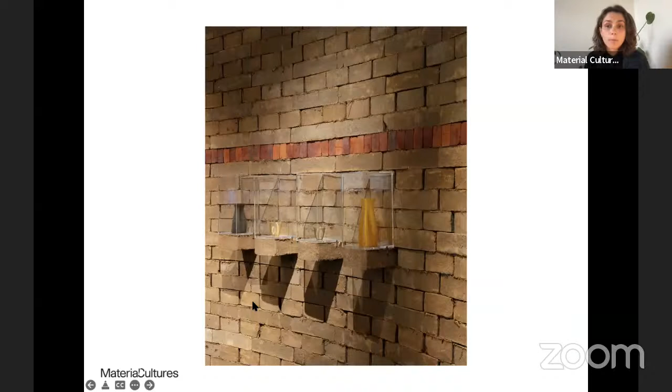So our work encompasses advocacy through design and curatorial work, where we can demonstrate the beauty and adaptability and also the practicalities really of working with low embodied carbon materials, as well as the extraordinary impact that they can have on the thermal performance and embodied carbon of our building stock. And we teach currently between the three of us, across Central St Martin's and also the Architectural Association.

And this is a project we finished with our students last year called Carbon Copies. And for this project, our MArch students looked at the impact of translating a series of iconic residential typologies, which exist today in London, into a fully bio-based and low carbon material palette.

And then they built fragments of them at 1:1. On the left, you have a detail of the party wall in the Eric Lyons span house typology, remade predominantly in adobe and timber. On the right is an example of the Walter Segal self-build method made in a bio-based palette with very thick walls, which adapt to regional insulation stocks. In this instance, I think it's built with cork.

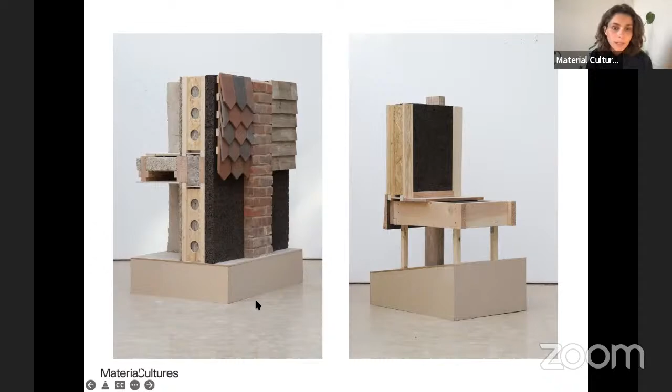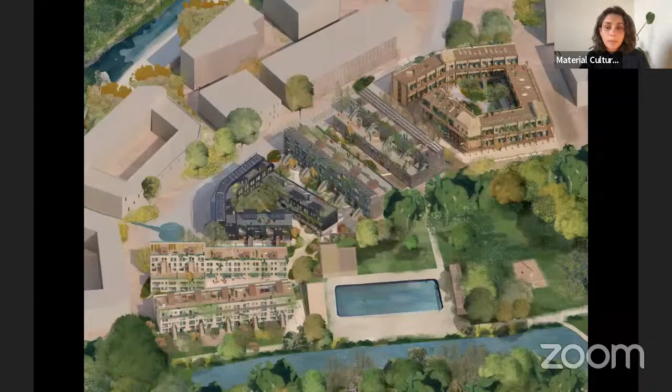We also design demonstrator buildings, which are prototypical and can be applied at scale across new build developments. So we think with every instance about the impact of that typology, and we work with our clients to develop offsite fabrication strategies for their projects, which work with regional and bio-based material supply chains.

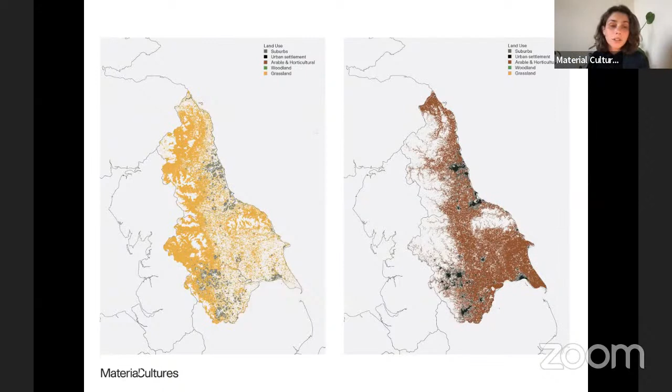And our work also encompasses research into materials and their application in construction, but also crucially on their impact on our culture and on our landscape.

So we look in our work to support systemic change in the construction industry. For the last 50 years, we've been using crude oil to try and solve the problems of sustainability in architecture. And the realization that this type of sustainability is short-lived has finally dawned.

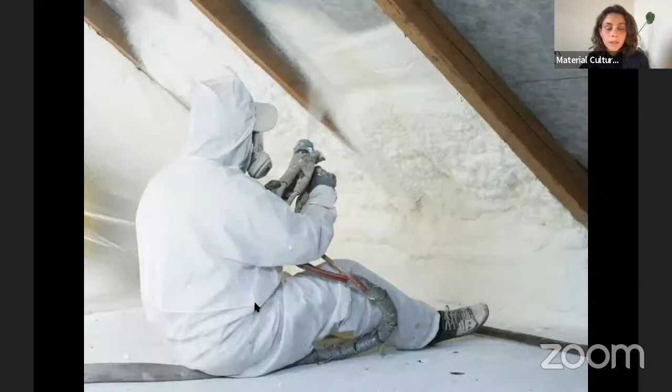And it's in this context that we established Material Cultures. Our construction industry has produced a multitude of oil-based insulating and high-performance products made from polyurethane and polystyrene insulations and nylon thermal resistors and PVC air tightness membranes, all extraordinary products in their own way.

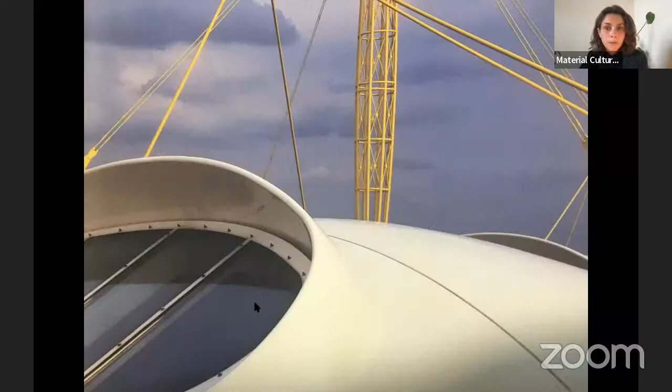And we developed construction technology using materials like steel and aluminium and glass. Their availability is dependent on vast quantities of cheaply available oil in the form of air conditioning systems or heat recovery units or even triple glazing. These technologies are neither durable, nor are they expected necessarily to last.

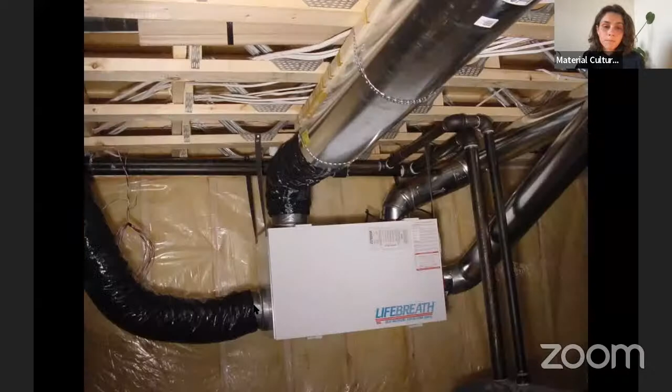And most contemporary buildings require specialist knowledge and equipment to maintain them. This is knowledge which is easily lost. It might be economically inaccessible to people, and it depends on parts which readily go out of production. This technification of architecture has concentrated power in the hands of the technocrats.

Our current material culture transforms vast quantities of extracted materials into vast quantities of waste, and it does this extraordinarily efficiently. We exist now in the oil age of architecture.

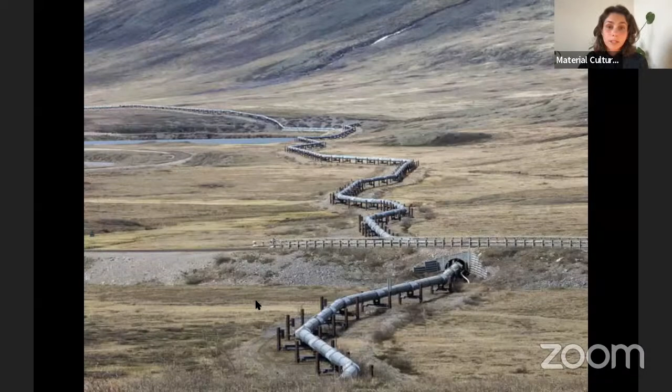The circular economy is the idea that in order to think meaningfully about sustainability in relation to human production, we need to consider the entire life cycle of everything we produce. So embedded in this are three key material cycles: composting, recycling, and reuse.

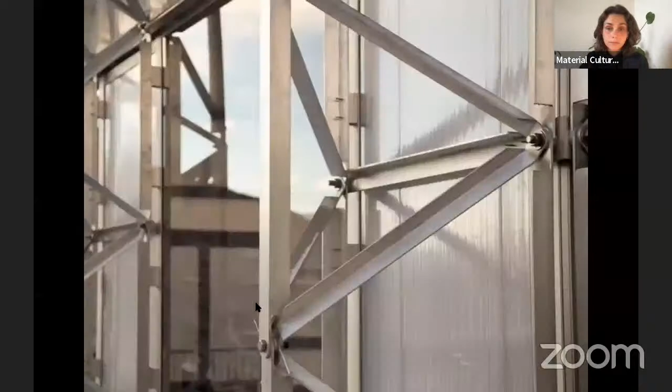William McDonough, who was one of the authors of Cradle to Cradle, the founding text of the circular economy, recently developed the Innovation for the Circular Economy House. This is a building system made entirely of polycarbonate, aluminium, and aerogel. These very high energy and high carbon building materials are justified by the idea that the system is designed to be demountable, meaning it could be reassembled elsewhere.

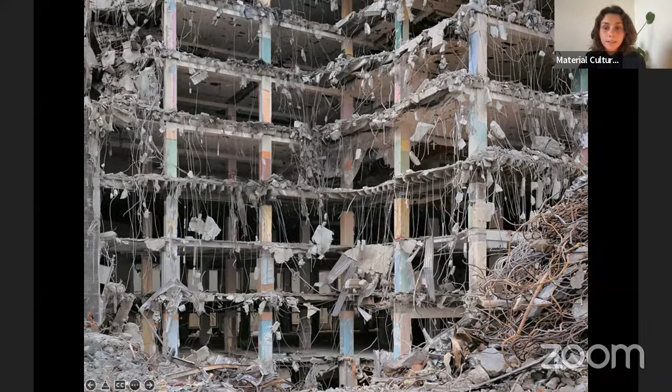But due to the number of components and their complex dependencies, implementing reuse and recycling in construction in a meaningful way represents an immense and potentially insurmountable logistical challenge. Ultimately, it demands vast warehouses, distribution networks, and mass standardization. It also has to acknowledge the inevitable entropy and significant loss of energy, carbon, and functionality along the way, and also the significant energy required to redistribute and recycle elements.

But if you think about those three cycles I mentioned, composting, recycling, and reuse, recycling and reuse broadly receive the most investment. And we think this is because reuse and recycling maintain the logic of capitalist growth. It's a fanciful narrativization of the future which justifies the continued use of high energy materials that we have become so dependent on, and it allows us to maintain the status quo.

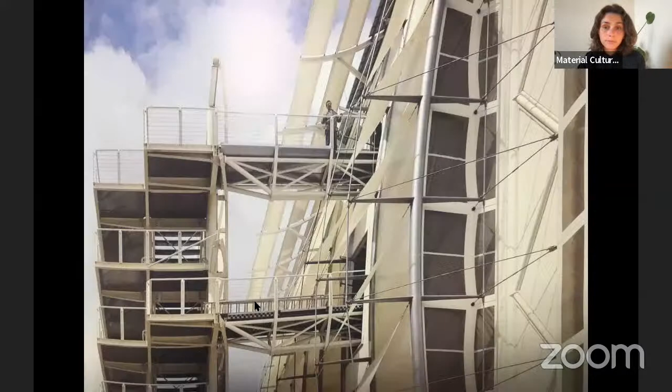Reuse and recycling again very quickly become highly technocratic. Standardization means fewer authors, and we lose sight of architecture as a crucial mode of cultural production, and we further consolidate the almost total monopoly of the white male technocratic author.

The reality is that the circular economy is not possible with the materials we are currently dependent on. So what's the alternative? How do we respond to the evolving needs of a society without the disastrous effects of our current modes of production and growth?

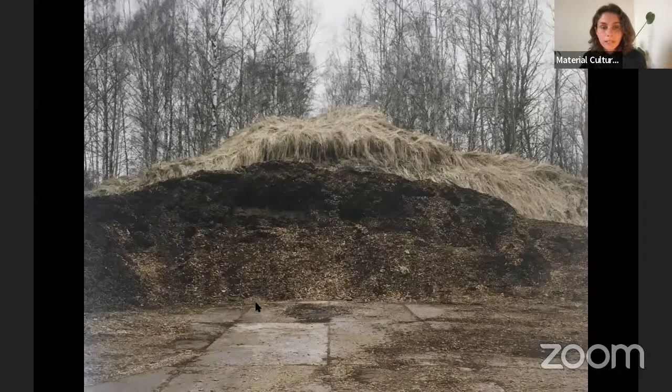Nature deals with waste in other ways, through composting and fermentation and decomposition. And these are processes which reintegrate matter into natural carbon cycles where it has the ability to regenerate and regrow.

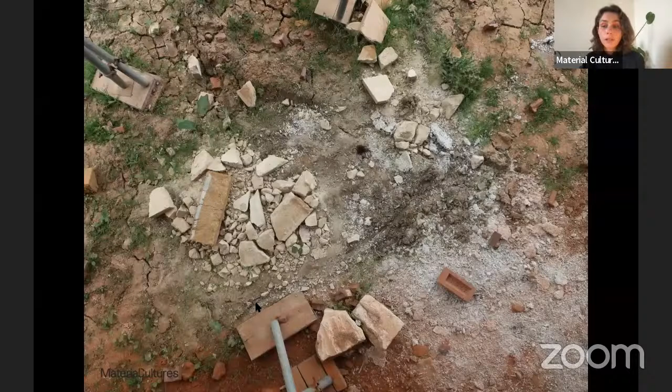So in material cultures, we're interested in what happens when we work with construction materials that can remain part of biochemical and nutrient cycles. A mode of construction where at the end of their life, the constituent parts of a building could simply return to the ground.

Materials which aren't contaminants, they belong to the landscape. This is how we made things for thousands of years.

These materials have an inherent plurality. They can accommodate many standards and many authors. In fact, bio-based materials will sequester rather than generate carbon.

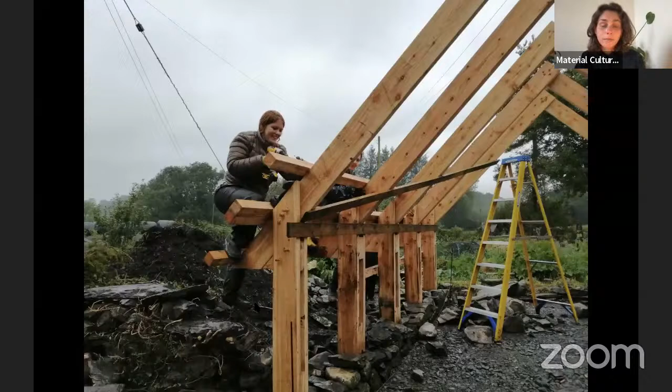They're accessible and they require few specialist tools, and you can use simple detailing and a kind of intuition when you work with them. And they allow architecture to be culturally generated.

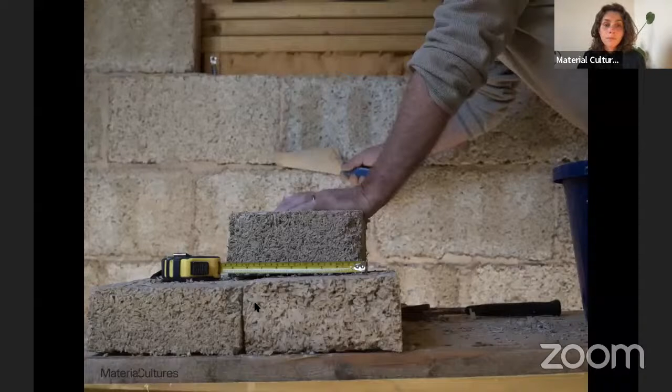And perhaps they suggest a different type of relationship to a building, situating architecture in relationship to care. And this is a care which requires human investment and a different set of relationships to place and the formation of new cultures.

Bio-based materials could be produced efficiently at regional scale, and they can integrate with existing crop cycles. So the other implication is the possibility of architecture rebuilding a direct relationship to place, which means things traveling less far and it being much easier to return and assimilate them back into an ecosystem at their end of life.

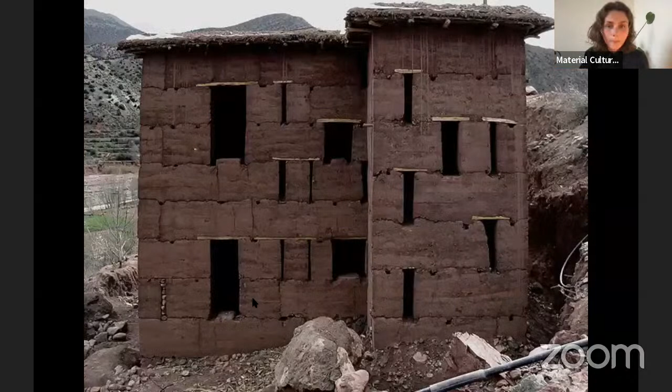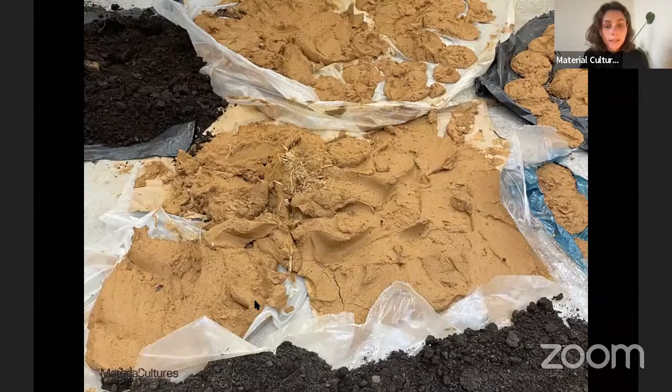You could see a building as a gathering up of different parts of the landscape. And coming straight from the ground, these materials invite direct contact and experimentation and play.

This is at the center of our practice, because we think there is a huge amount still to learn and also to relearn. And that maybe a new relationship with materials is a way to find new languages for our buildings, which have the potential to supersede those that we've inherited.

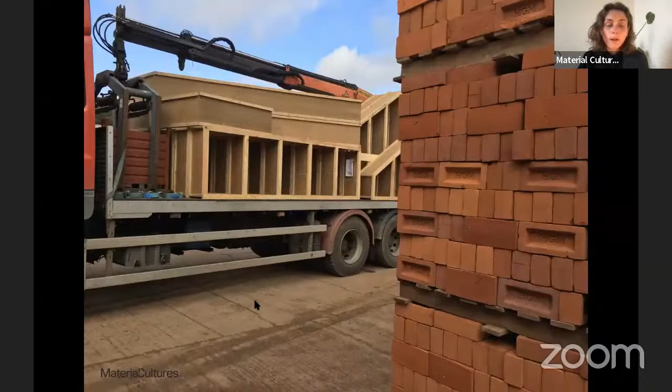We're aware our approach might be considered Arcadian, but we're also interested in the role of contemporary tools and modes of construction, which means we work with building offsite where possible and with efficient forms of mass production, because we know the problem is massive and it needs to be met at scale.

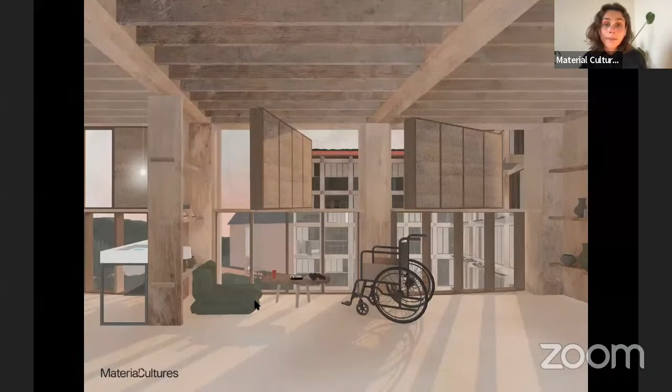In order for change to come quickly enough, the status quo needs to be challenged on ecological and economic terms, which means embracing digitized construction processes where repetitive and non-specialist labor is carried out by machines.

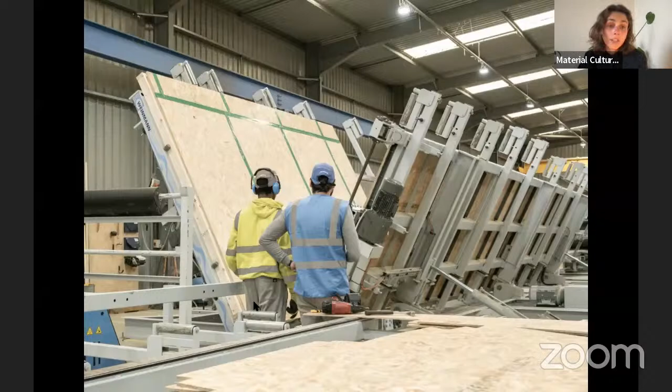Off-site, we have the ability to improve working conditions and to change construction cultures and to reimagine factories as sites of creativity and cultural production.

So we're interested in how these ideas can scale to the size of a town or even a city. But I'm going to talk about two projects we've been doing in the last year to start with.

And the first is an exhibition project which we completed last autumn for the Design Museum in London. It was for a show called The Waste Age, What Can Design Do?

The show is essentially about our current relationship to waste, the potential for its toxicity and how we can reuse waste. Sorry, there is actually a storm going on outside now.

And what it might mean in the future for us to exist without waste, or what's a post-waste society like. So the exhibition itself was forefronting the work of scientists and designers who relate to and work with the issues of reuse and recycling.

And our brief from our client was to design the exhibition with this agenda of waste, but also of low embodied carbon construction in mind.

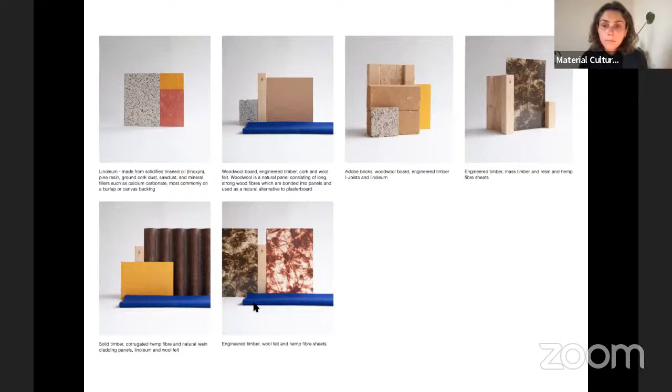So the way that we work through this brief is we begin with a palette of materials, a kind of set of potentials. In this instance, things from lino to cork, composite fiber boards, adobe, and we sort of have a broad spread of a palette which might be appropriate.

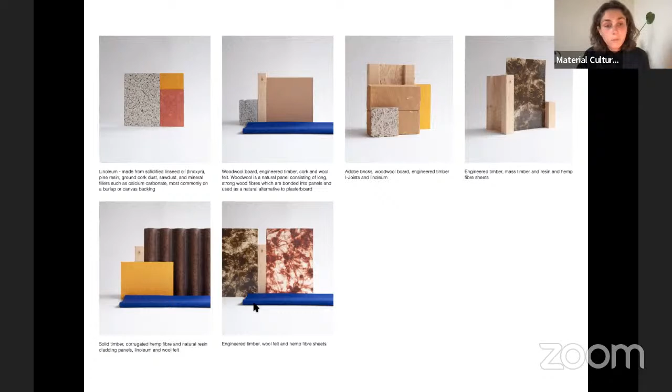And then we start to assess these materials as we work with them, looking at them in the abstract, which has its failings, but we look at the materials in terms of their impact on the environment.

This is a tool called the Material Pyramid, which we did not design, which is fantastic. You can access it online. It hierarchies materials based on their global warming potential, their impact as a kind of carbon dioxide equivalent through the processing of these materials.

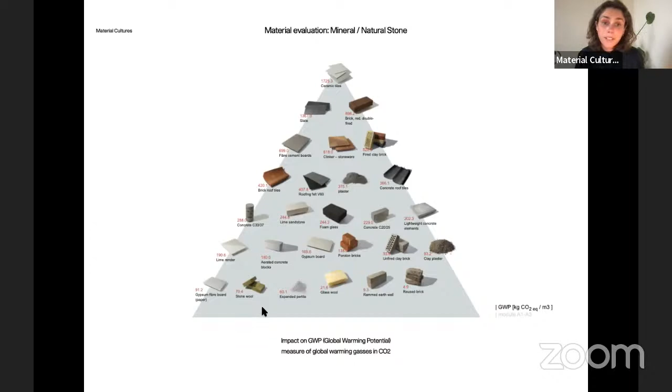What it doesn't give you a sense of is the impact that material has once it leaves a factory, in terms of how far it has to travel to your construction site, and the way that you build it and what you do with it at the end of its life. But it's a really useful way of giving you some kind of abstract hierarchy between materials.

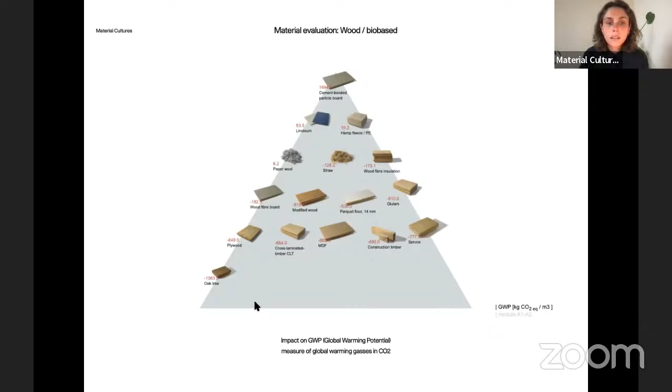It's not just in terms of their impact on the environment that we assess what we pick to work with, it's also their cost, their distance traveled to site from source, and what will happen to them at their end of life. How easy is it to take something apart with this material fixed to this material?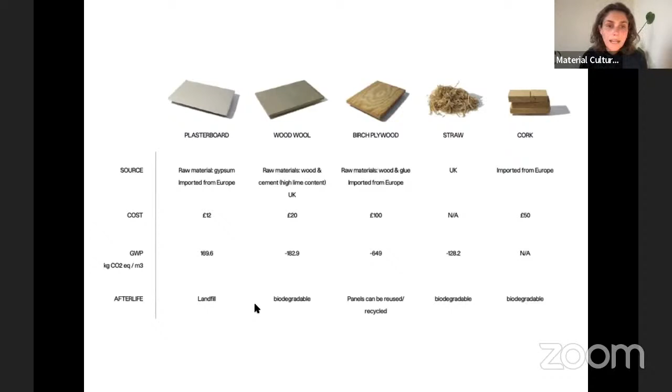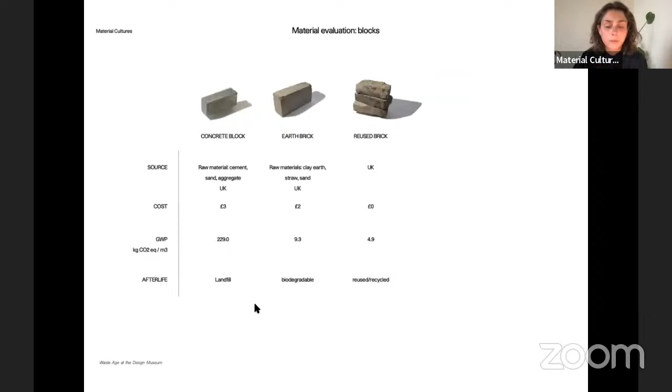With all these different factors at play, and principally almost always budget becomes the most important one, we started to make choices for our client with them as well around the palette of materials, which would be efficient to use and simple, and also spatially rich, and start to talk about what it might be to have a future without waste. So our brief for ourselves was that the structure could essentially compost if at the end of its life the materials get reused and reused. The very last step is that they can return back into a kind of carbon cycle.

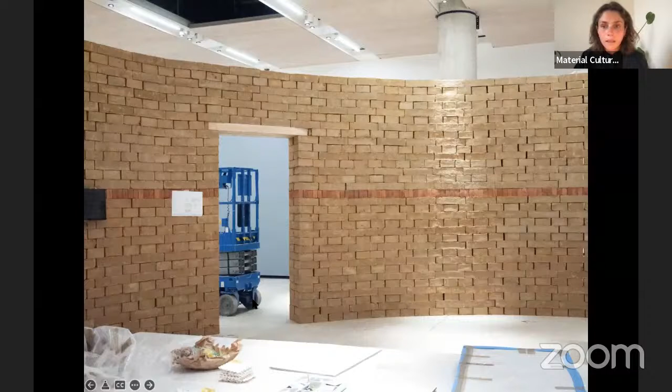We conceived essentially of a sort of temporary infrastructure within a very high specification environment. The world of art display and museum context is a different place to be using natural materials, but it felt like an important place to demonstrate that you can use them in that context.

The cultural industry is, broadly speaking, extremely wasteful. Exhibitions go up and they go down and the materials get skipped. So we used, in this instance, here we're looking at the adobe wall with a fired brick detail.

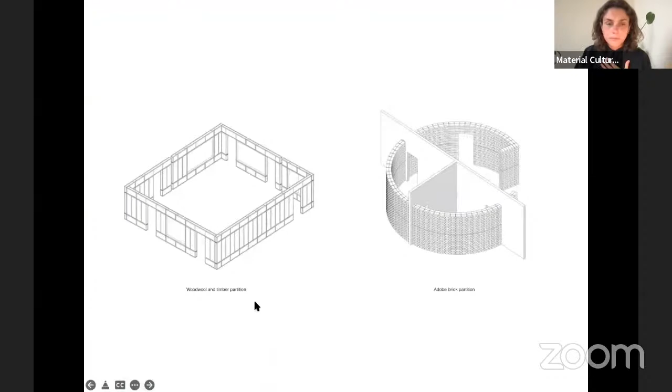We've essentially introduced two spatial moves into the exhibition space: a cassette system of timber joist and wood wool panels, which is prefabricated, and then a curved adobe brick wall on the right-hand side.

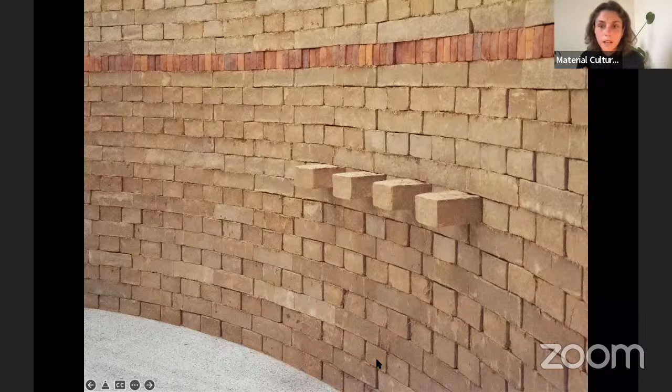We introduced a single fired course of brick for fixing and hanging pieces to, and occasionally we rotated the adobe blocks to form shelves or plinths for display.

Within the cassette systems, we lined out the wood wool panels to form niches for display using beautiful clay plasters, which were pigmented with ash.

We then looked at the different spaces which were created by intersecting these very simple forms, what they would create and how you'd move through the sequence of spaces.

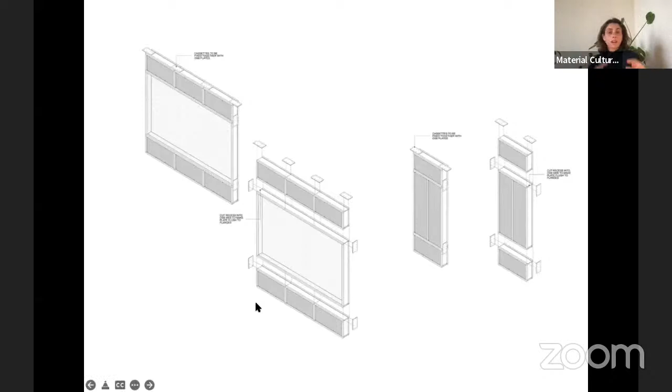This is how the cassettes were designed to come together and also ultimately to come apart, so all of the pieces could be unscrewed and hopefully be distributed at their end of life. We worked through mocking up these cassettes on site.

Crucially, and really interestingly, we worked with environmental consultants throughout the process of the exhibition design, consultants called Urge, who audited us in terms of not just our material choice, but also how many times we traveled to site and how we traveled, how many emails we sent, and what the electricity bill we had while we were working on the project was, and our energy use. So they really audited the whole process of the design and installation.

Which is really extraordinary and a really interesting process. I think it was certainly the first time the Design Museum had gone through an audit in such detail, but it sets a great precedent, I think, for cultural projects, that they should be assessed by that criteria, as well as the quality of the spaces that you create with them.

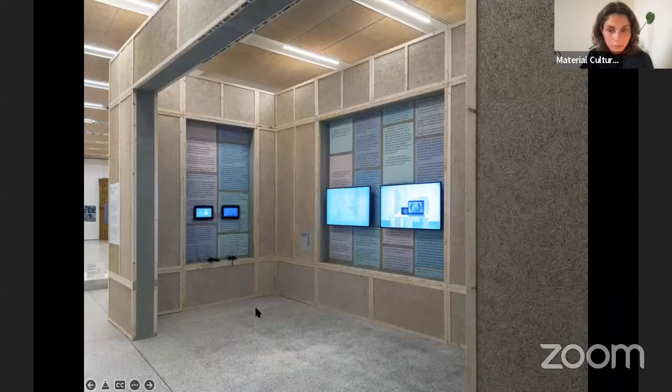This is the show as it was fully installed. Here we're looking at the precious waste space with lots of the pieces that were designed for the fashion industry, using the reuse of textiles and cloth. And just some more of the images of the space, the installation.

I will move through very quickly.

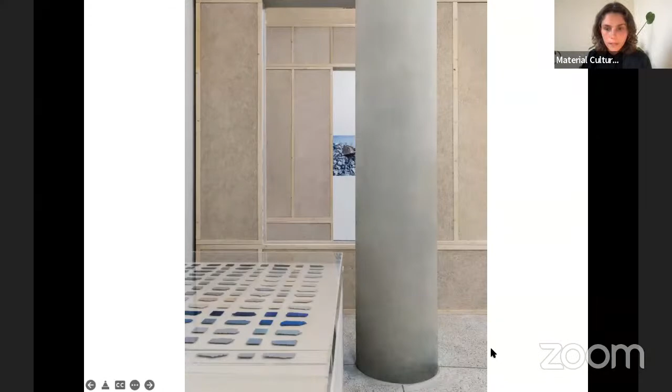So we're interested as a practice in the different scales that we can work at. You know, that's a tool for us, I think, the exhibition design, because it attracts a different audience and engages a different set of people. And the impact that the built environment can have has all these different scales, and scale of the city, but also has unintended consequences. And the work that we do looks to interrogate those consequences as much as we can.

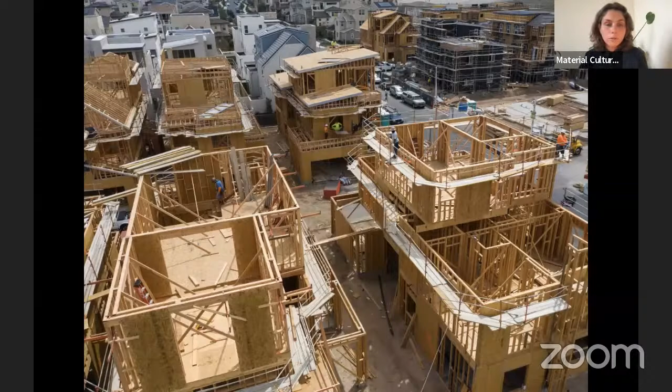You know, there are limits to our knowledge, I think, but we find consequences at the scale of the material, particularly at the scale of the building. When you assemble that material into a built structure, what that does to the language of our cities and our streetscapes. But then also, if you look again at the scale of the landscape where that material came from, what has your choice as a specifier meant for somewhere else? Like, what have you displaced in the action that you take at your desk?

So I'm going to talk a little bit now about a research project we did last year, which examines those three scales more specifically in the British landscape context. So last year we worked for the North East and Yorkshire as a region to develop a strategy for a bioregional construction economy alongside our partners at Arup.

So this research was funded by the York and North Yorkshire Local Enterprise Partnership and the North East and Yorkshire Energy Hub. And we looked for our client at how to enable the production and take up of bio-based products, and how agroecological processes might be integrated into a transition of the construction industry. We also asked then what the impact might be of doing that on our landscape, from the potential benefits of a transition, as well as the limitations of one today.

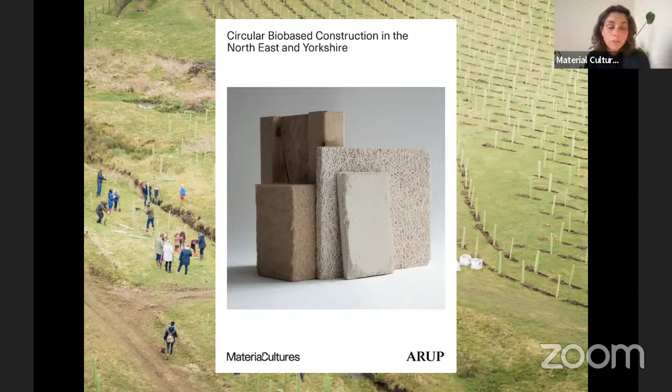So this is a sort of broad snapshot of the North East and Yorkshire, which is an expansive part of the United Kingdom. But across the region, the local authorities in these different districts are pulled between a very clear divide: the drive to develop land on the one hand for housing and commerce, and also to preserve our landscapes and the biodiversity within them on the other. So it's this intersection which we were really interested in, the intersection of the climate crisis and the housing crisis. And that's what our research in this region addresses.

So we estimated that approximately 30,700 homes a year need to be built across the region, or 500,000 homes by 2038. In embodied carbon terms, that would be more than 26 million tons of embodied carbon if we built those homes in the way we build them today. Now, a bioregional construction economy means essentially that you work with bio-based materials. And we investigated what these essentially regenerative materials are and what they could be if they were sourced within Yorkshire and the North East, looking at what activities already take place.

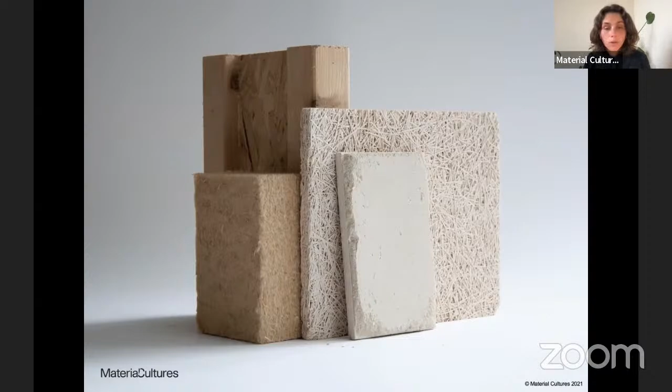And we found that there is a burgeoning industry, feedstocks which range from timber to hemp and straw. And there are lots of exciting new businesses in the region which are already growing those materials, manufacturing them into products, and innovating in an otherwise extremely conservative construction industry. And some of the areas that we looked at have some of the highest levels of deprivation in the country. So expanding the region's capacity to produce and use these bio-based materials could help tackle inequality within the region, provide new farming opportunities, new jobs in rural areas, as well as contributing to the number of processing and construction jobs that you have across the region, where there has been a very sharp decline in skills and employment.

And if we look at these materials at the scale of the feedstock, something like hemp can be a really great addition to a landscape. It provides direct biodiversity benefits, very simply because when you grow a crop of hemp, you don't need to put pesticides on it. It's so vigorous, and that improves the soil and increases the yields of some of the follow-on crops. So if you have a field of hemp and then 3 months later you put some wheat on it, the wheat will do better because the hemp was there beforehand.

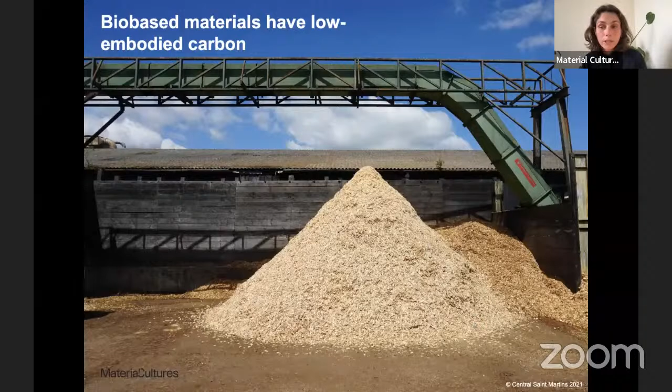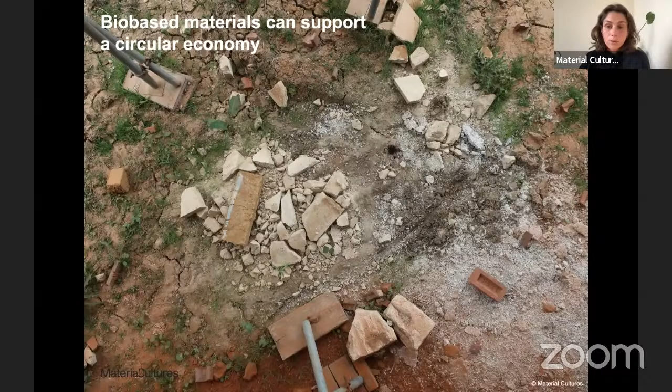They're also really low in embodied carbon, these bio-based materials, which I keep alluding to. They sequester carbon dioxide while they're growing. And because they're plant-based materials, they're also renewable, and they can therefore help to support a circular economy. And so very simply, substituting carbon intensive construction materials with regenerative resources from the biosphere is a really key approach now to decarbonising our built environment.

And at the scale of the building, we looked at the impact of taking these bio-based materials and applying them to a generic housing typology. So we looked at the new build 3-bedroom semi-detached house by an unnamed developer, but you could probably guess which one. And we found that these materials in the context of a home can create healthy environments for the people that live in them, but also along the supply chain from the people involved in their production and application to the end users of the spaces that they create.

So we did a very simple swap. We substituted a conventional palette of concrete block, PIR insulation and plasterboard with timber frame hemp batt insulation, which is a kind of floppy hemp fiber version of rock wool, but natural, and a new lining board product, which is a lime and hemp lining board being manufactured in the UK, which uses the waste from hemp processing as an aggregate.

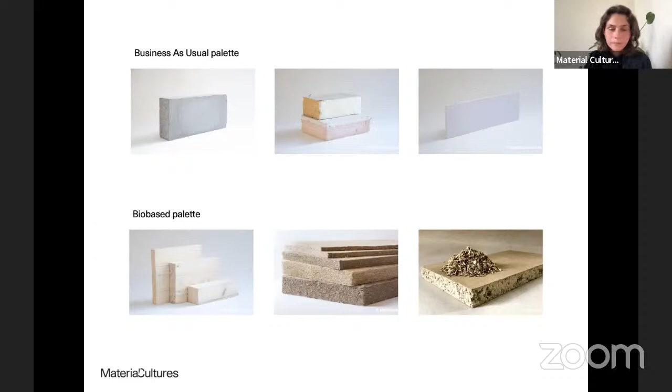And we redesigned the envelope of this very standard home and looked at what the wall buildup would be of this house. You know, it gets thicker, but we made sure that the two houses were comparable in terms of building regulations and building standards. They perform the same. We also picked those materials very simply on the basis that it's a palette which exists today. It doesn't require reskilling construction workers, and it doesn't really require a change in understanding of how you build. They're sort of skills which exist. We're just doing a kind of sneaky swap.

And the impact of the substitution is that you get 198% reduction in the embodied carbon associated with these components, which is equivalent to the energy consumed by 4 UK households in a year. That's per house. So if you extrapolate this across the region's housing need, we could be saving something like 2.88 megatons of carbon dioxide equivalent by transitioning our industry to a bio-based one just in the Yorkshire and the North East. Predominantly, you can see that's because of the green, it's because of the biogenic carbon, the carbon which is sequestered in the house, in the plant materials.

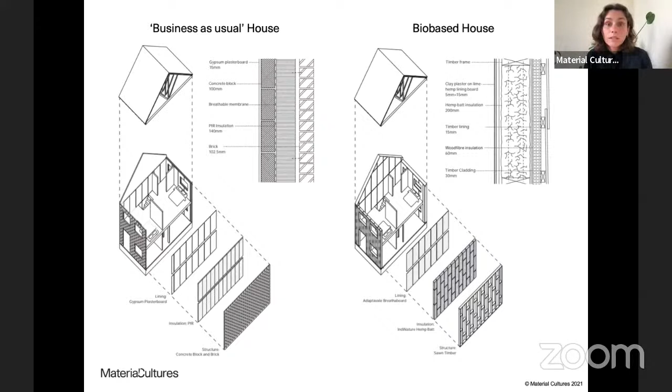And what I should say, and I neglected to mention, was we didn't change the foundations in our study. I assumed they were still concrete, because I guess there are some assumptions and some changes that you have to accept that the construction industry is going to be slow to enact. But this is a house we could build tomorrow instead of that house on the left-hand side.

And if you zoom out again, one scale up to the scale of the landscape, what would it mean to grow and manufacture these materials? Would that mean an era of much more industrialized agriculture than the one we're just leaving? Increasingly, farmers now in the UK are looking at much more diverse methods of farming, which involve growing numerous different crops in close proximity to one another. So this diversification offers them alternative revenue streams, but also benefits to ecology and biodiversity. And bio-based materials can be grown in this way alongside existing crops and dovetail into existing rotational systems.

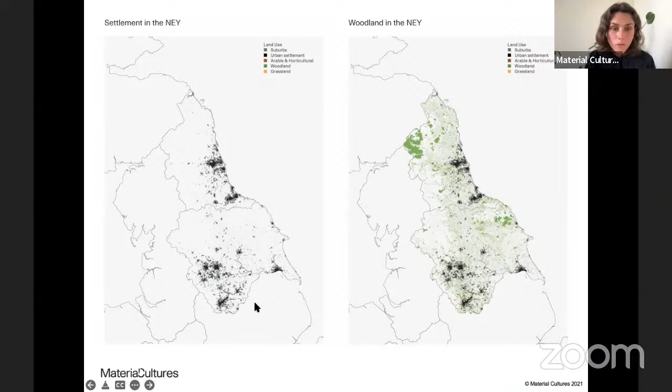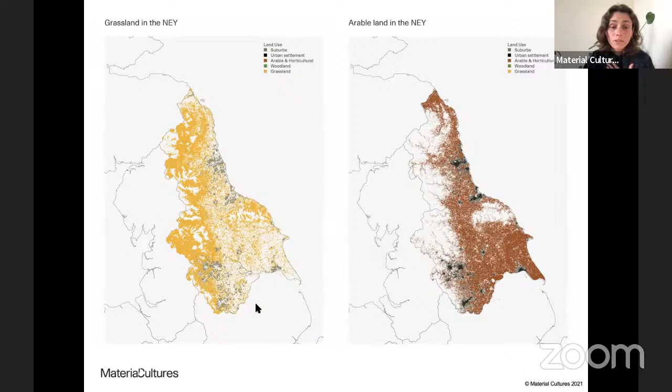So we look at the North East and Yorkshire as a region. This is a kind of crop of the United Kingdom at the neck where it meets Scotland. You can see that there is not much woodland cover. It has one of the biggest forests in England, Kielder, on the border with Scotland at the top. But otherwise, yeah, forestry is not one of our great strengths. But there are significant areas of grazing land, which is shown in yellow, and arable farming shown in brown. Lots of the land is dedicated to sheep farming, essentially. But farming is the most substantial industry.

And in our research, we found that looking at those existing land uses, changing to a bio-based construction economy doesn't actually require much change to the existing land use. Substantial afforestation is already proposed across the UK. But what's really crucial is that when we plant these new trees, we do it much more quickly than we are, but also that we develop a culture of productive woodland alongside national parkland.

There are kind of two factions in forestry in the UK: people that like to enjoy forests as recreational resources, but also for their biodiversity and ecology. But then there's the construction industry and the productive use of woodland, and they are at odds. But we will need both if we want to transition our industry in the way that we talk of. But if we look at the areas of woodland needed to supply the structural timber for this housing study, these are really small fractions of the existing forests.

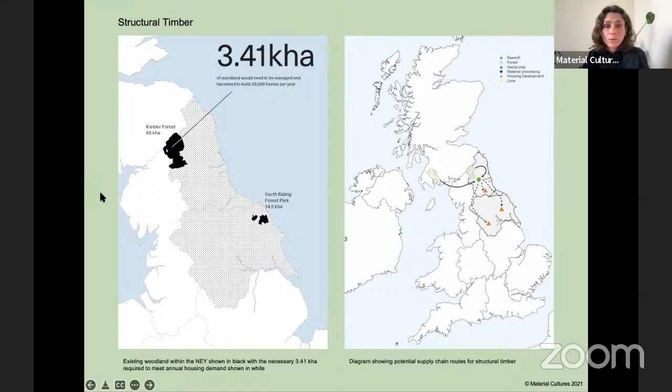So we need about 3.4 kilohectares of timber to meet the annual housing need of Yorkshire and the North East. That's a small white blob, just represented inside the mass, which is Kielder Forest on the borders. And if you were to grow the insulation and lining materials like hemp or straw, that doesn't actually represent a dedicated land use. Straw is a byproduct of producing wheat, and hemp is a rotational crop. We're talking about 3 or 4 months a year of cover before you switch to your next crop. So although you need significantly greater areas of land, that's not a dedicated land use, and food production can still carry on as normal.

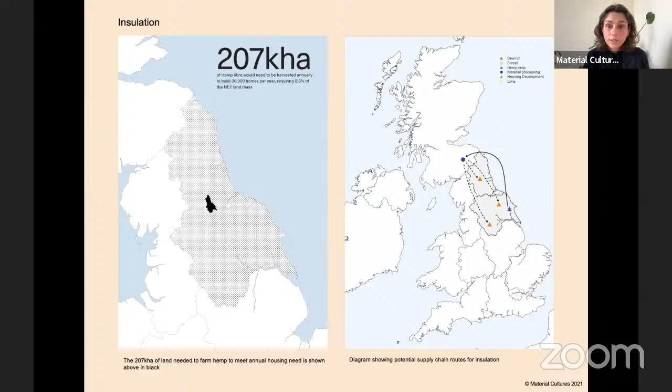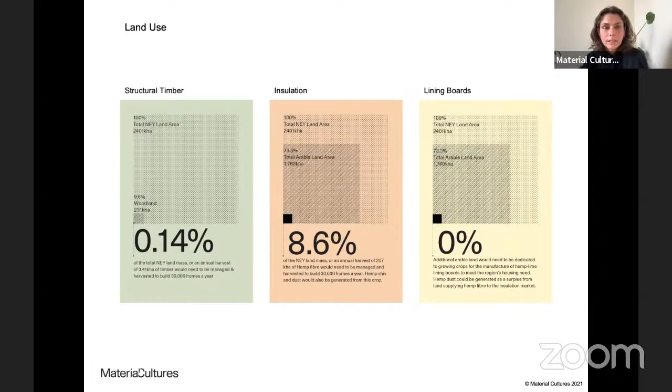And the lining board product we looked at uses waste from the production of the insulation. So although the area of land that you need is much more significant to produce that waste, it's a tertiary byproduct essentially of production of other farming products. So we're looking at very small fractions of land to shift tomorrow, basically, to this different way of building. But essentially what we understood was that there were significant benefits. There are different cultural factors at play which limit this transition.

In terms of the significant benefits, the economic value generated for the region over the next 15 years alone of shifting the way we build could range from between £5.5 billion to £14.8 billion. And in none of those scenarios did we ever assume a 100% transition, because that seemed extremely unlikely. The most ambitious scenario is talking about a 40% uptake of housing stock being built in this way, but generating new industries around that, which is obviously extraordinarily beneficial.

And so what's been stopping us is the real question, because in many ways it seems like an obvious answer to a complicated question, but there are many more complex reasons, unfortunately. Regulatory frameworks is one of them. Some of this now is very specific to a British landscape context and a British construction context, but many of these factors, I think, are global. We understood from the people we were talking to that there are regulatory frameworks which stop startups entering the market, but also the fact that planning policy and the building regulations don't support using materials in this way at scale is inherently very problematic. You aren't penalized for building bad quality buildings, and by bad quality I mean high carbon.

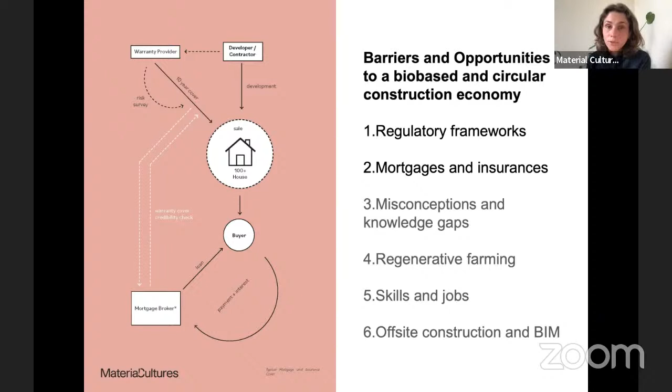The finance system in the UK around housing is also a seriously limiting factor. So you need to get a structural warranty to build a new house, and a structural warranty is subject to insurance, and your insurance is then what facilitates getting a mortgage. And essentially the mortgage industry is very risk averse, which means building the sort of building that we speculated on at scale today is impossible if you needed to be financed to do it. There's also just a whole host of misconceptions, I think, around what these materials are like to work with, what the consequences of using them are, and how safe they are as well, very simply.

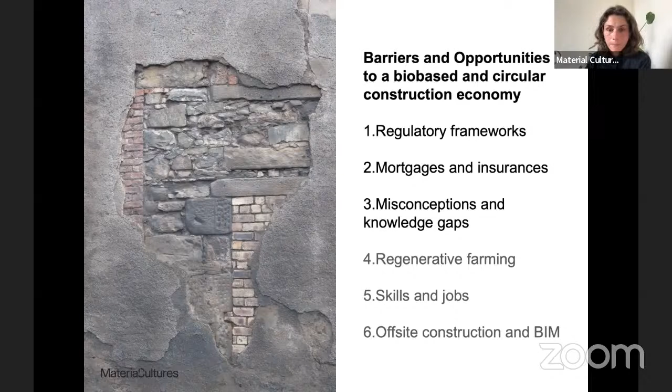But there are opportunities too. We think that regenerative farming is an opportunity. In the wake of Brexit, there have been significant changes to UK agricultural policy, but also across Europe, there's much more of a shift towards agroforestry practices. And in that, we're talking about things which mean trees and crops, both things which could serve the construction industry, being brought closer together and serving better biodiversity within the landscape.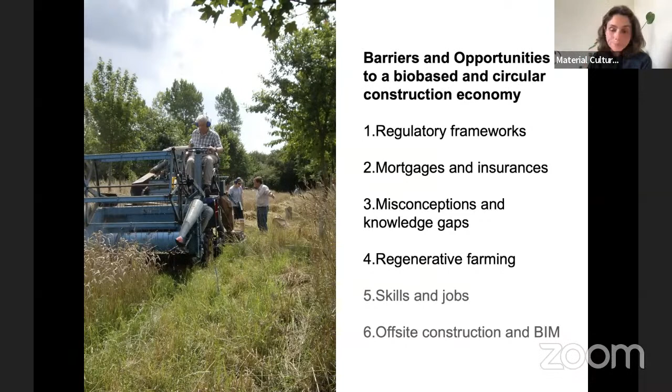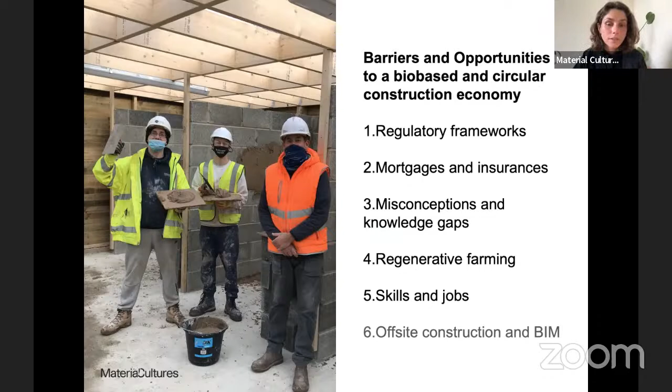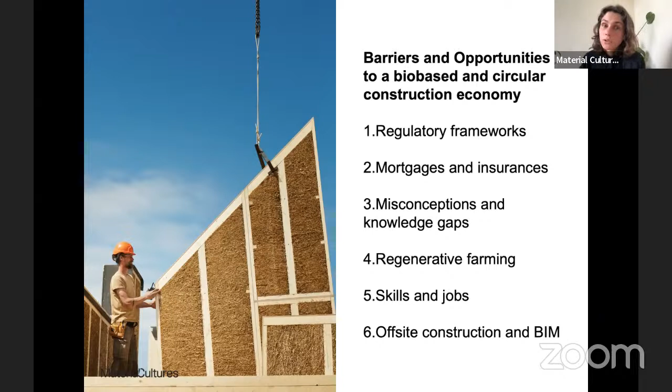Skills and jobs at the moment are a limiting factor, but they're also an opportunity. We could be upskilling our workforce and giving them jobs that could last, skills which we need for the future rather than skills which are on the decline. And we have construction technologies today which could offer us all sorts of abilities to make these materials and systems more economical over time, because we also have to accept that today they are not, because they are not being supported by global supply chains which are very, very efficient. So our primary conclusion was that without state support, a low carbon construction industry in the UK will always be regional and small scale.

But the future of a decarbonised built environment now depends on previously disconnected industries working together to facilitate systemic change. So our question now is, how could these different and competing demands on our landscape be reconciled in a post-carbon future? Because the landscape of the UK is subject to a multitude of pressures, and many of them are considered to be in direct conflict with one another. Are our fertile soils better dedicated to grazing land or to arable farming? And how can reforestation and afforestation serve us and our landscapes ecologically, but also benefit the tenant farmer who has for a long time been compromised by the systems we put in place?

Now, whilst the climate crisis has finally reached our headlines, the housing crisis persists, and it presents additional complexity to the decisions that local authorities have to make to meet our commitments to reach net zero. And added to that, growing our new bio-based materials for the development still to come presents a reimagining of land use previously unanticipated at scale. Recalibrating our landscapes away from extractive practices towards a new model of land management, which fosters regenerative resources, is an exciting opportunity for construction innovation.

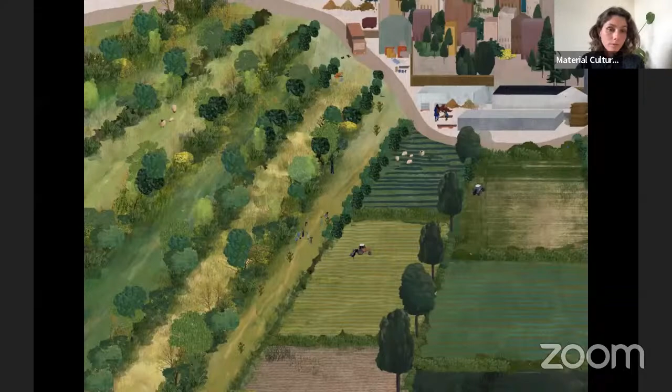But our question now is, what will this look like? Could our farming landscape draw more from agroforestry practices and bring greater biodiversity into the landscape alongside smaller mixed rotational farming? With sustainable forestry practices which facilitate the development of productive woodland and national parkland.

We know that our current economic modus operandi can't support the kinds of futures we envision for ourselves and for those to come. But as architects and builders and citizens, we have to urgently rethink our relationship to the land and to each other, and to form new forms of material practice and culture and economy in solidarity with people and also with our landscapes. Thank you very much.

Oh, thank you very much, Summer. Thanks, Summer. Yes, thanks a lot.

It was really exciting to listen to you, because you operate on so many levels. You really get the hands into the mud, not only in a literal way, but also into economics, and you try on all scales, but also in different political and social dimensions to investigate and realize these ambitions, which are so important for us, because as you said, we all have a choice, and now is the time to rethink these topics. And I guess it's also useful to operate with many formats, like you do research, you do exhibitions, you liaise with engineers like Arup.